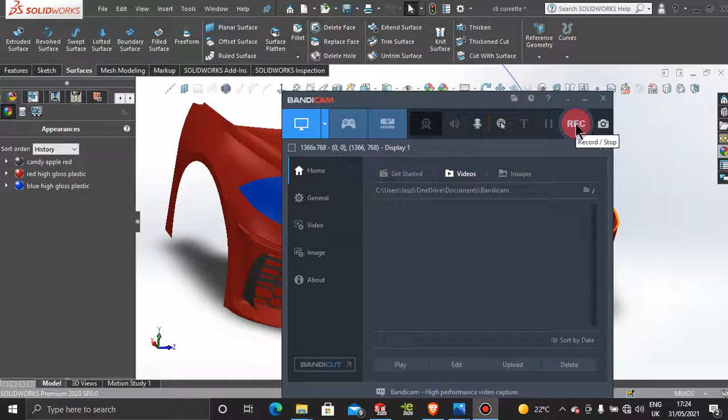In the last tutorial, we filled up the areas we needed to finish. In this tutorial, we're going to cut these joints out from this side here, then create the headlights, and hopefully the bulbs inside the headlights and the LED strip as well.

I'm going to start by removing these appearances, including this red one. Then I'm going to jump into the feature tree and click on this bonnet to bring me up to this area, because I want to get that sketch.

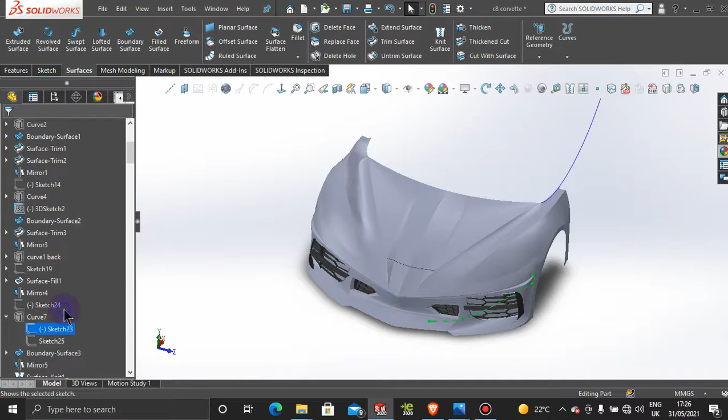It's in Curve 7 and it's called Sketch 23, so I should make that sketch visible.

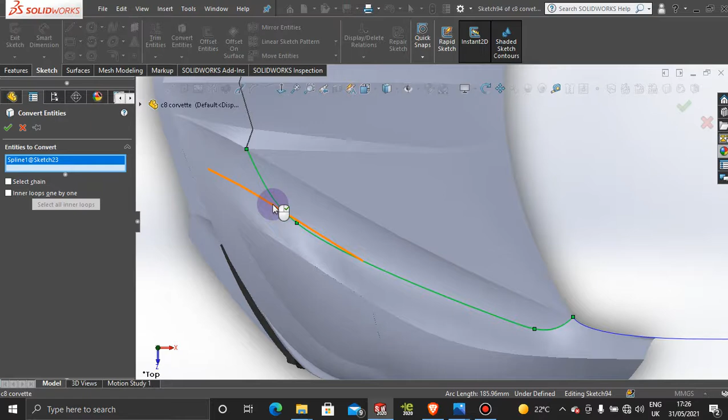What I'm going to do next is make a sketch on the top plane, convert this sketch here, press OK, and then exit the sketch.

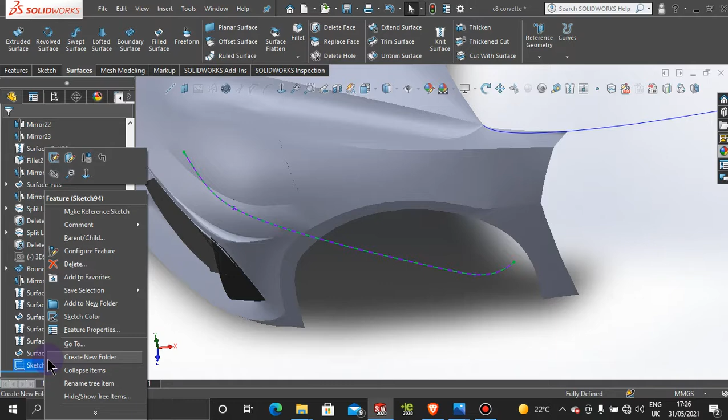I'm going to hide this sketch and hide the second sketch, then come back down here and bring back the first sketch we made, so it's not lying on top of each other. That's the sketch we're going to work with.

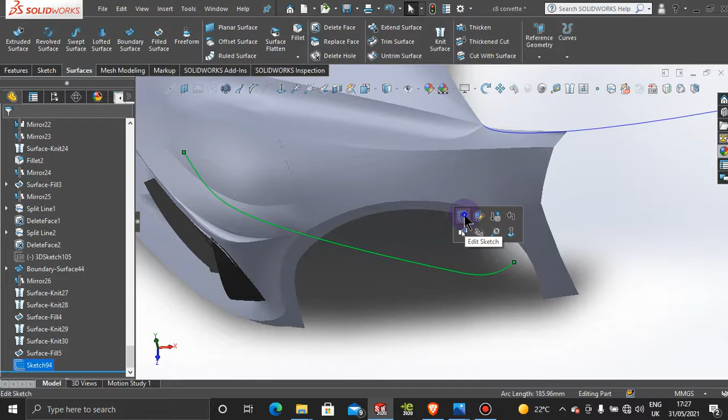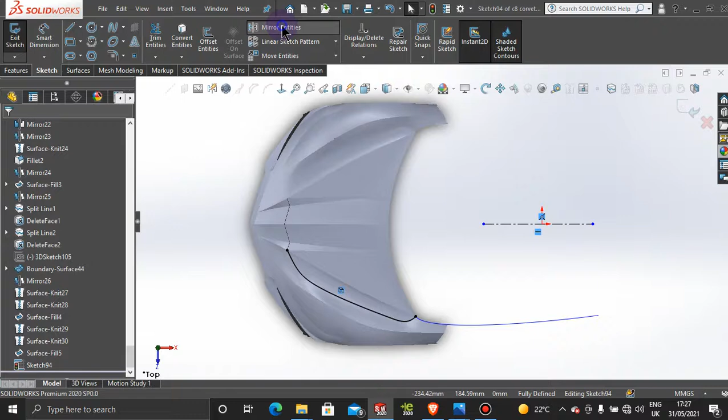So let's edit that sketch, jump to the top, and mirror this curve or spline up here. To do that, let's grab a center line and drop it here, exit that sketch, and then mirror this curve over this construction line. Then we'll come down here and create an offset of this curvature.

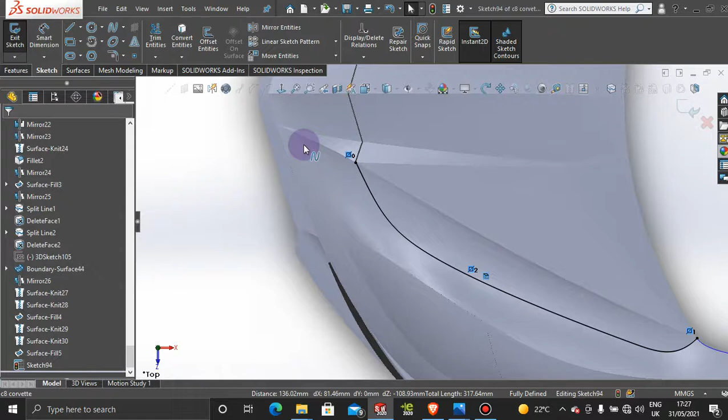That offset is going to come to the outside, not the inside, because we don't want to cut into the bonnet - we need to go outside because that's where the joint is heading. So let's grab an offset, click on this line, and get 0.5 on that. Let's do this side first.

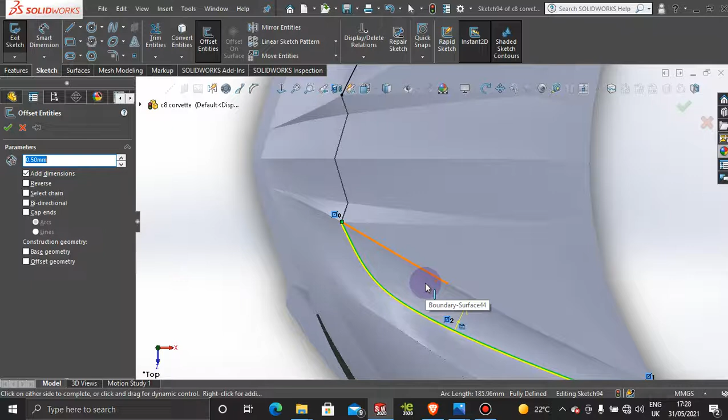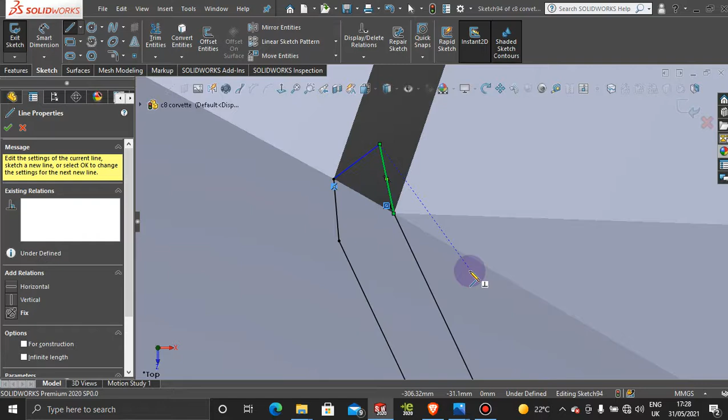Press OK, and I'm going to extend this line, but not by pulling this point - I'm just going to come into this corner and touch to that. So I'll grab this line, come to this corner, go all the way in here, and connect back to that point. On this end, I'm going to create something like a small triangle to connect those points.

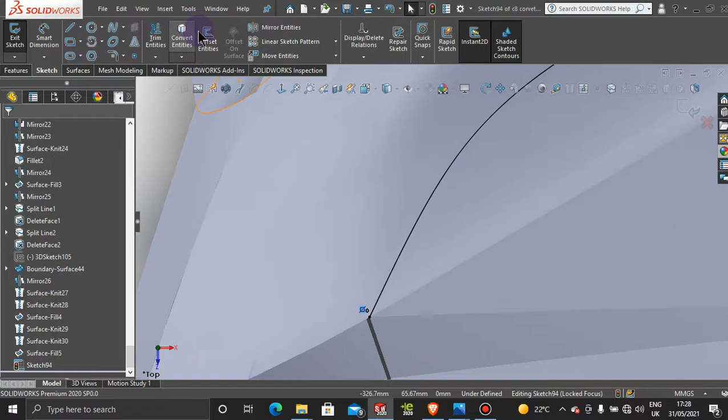I'm going to press OK on that, and OK on that. Now I'll jump over to this side and offset this curvature, but reversely this time. Press OK, and do the same thing on this side as well.

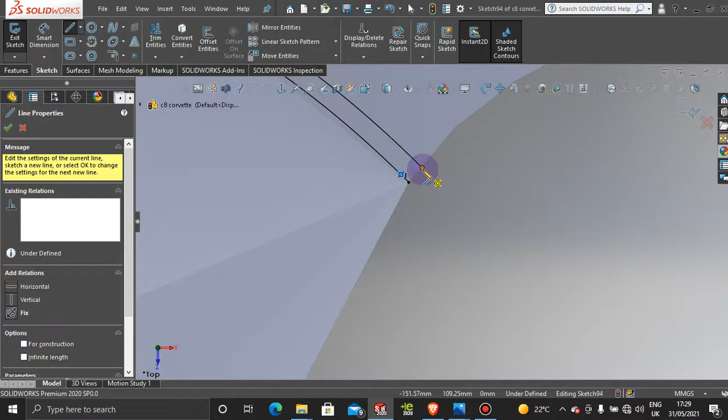Come in here, connect to that, come to the end part. I'm going to press OK on this one and exit this sketch.

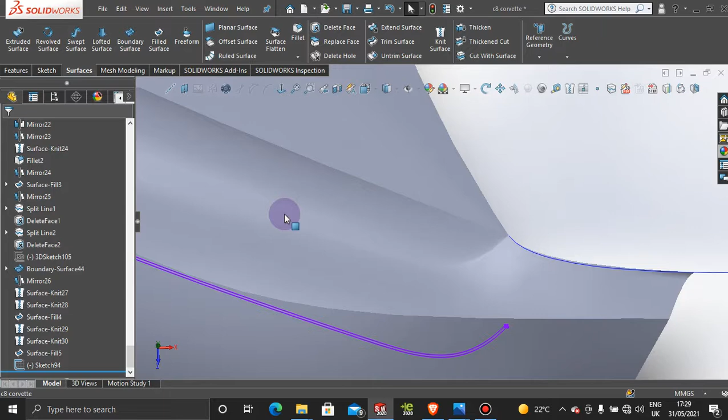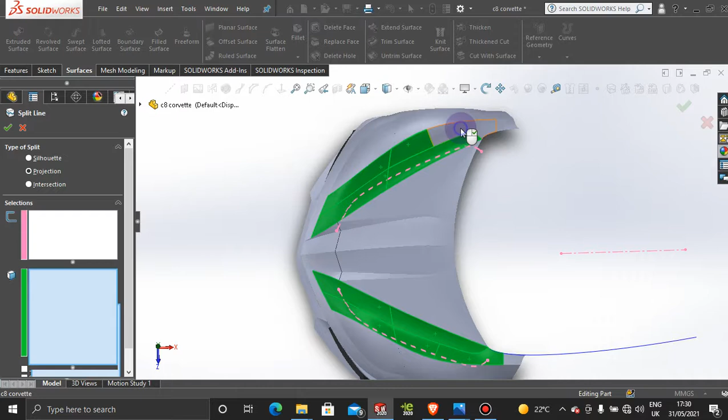Then we're going to do a split command, the split line, and choose the sketch. The faces that we're going to split are these faces here - let's try to do both ends at the same time, though it's possible it won't let us. It's okay, projection - and it did let us do that, so that's good.

So now let's hide these sketches, come in here, and delete these split faces from this corner. So, delete face, and select these joints in here - this is called forced trim.

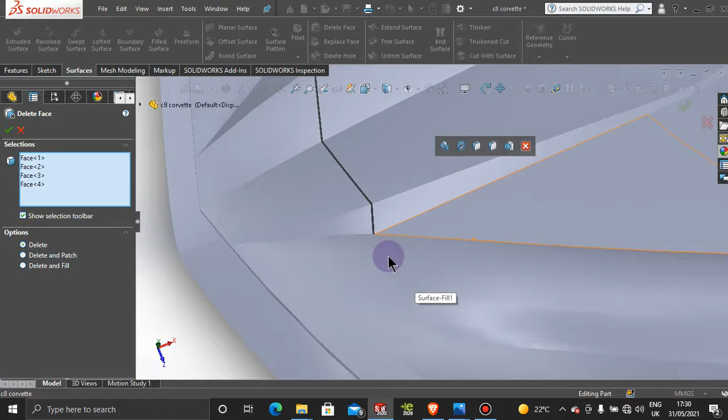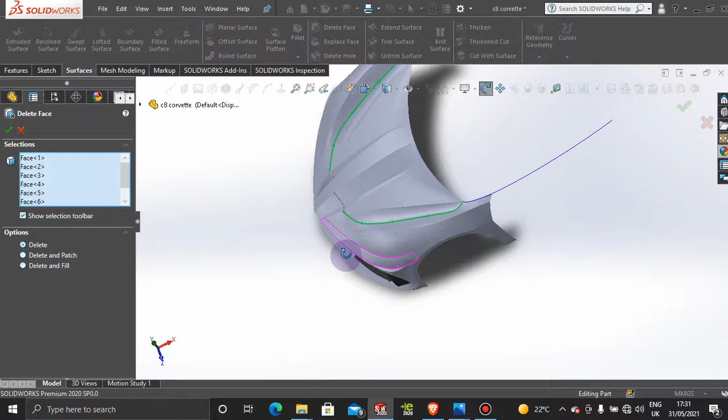There are so many people - if you look on YouTube, Google, or GrabCAD, everyone says it's impossible, that you have to take out the mirror and go back in the feature tree to do that. There's no need to - all you need to do is a split line and then delete the face, and that will solve your problem. But that's not in anybody's handbook, obviously.

Press OK once you've selected all the joints, and now we have all the joints cut out from where it needs to be cut, and our bonnet is free for movement, right? Okay, that's good. Let's save... well, let's not save it.

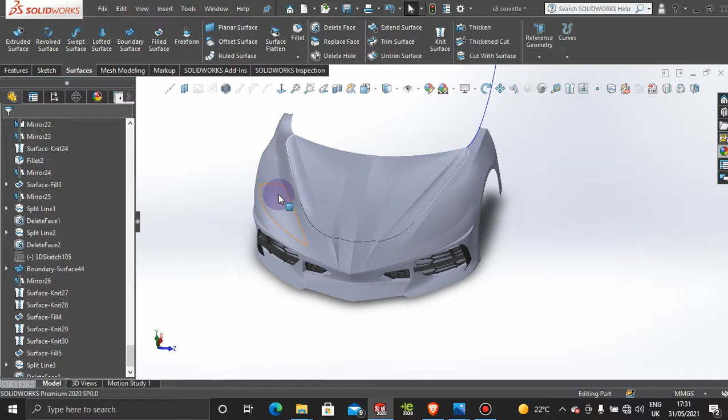The next thing we want to do is cut out the headlights. For that, I'm going to come into the first display state and hide all these hanging about bits here. Once I hide, not delete, hide all these curvatures here, I'll come back to you.

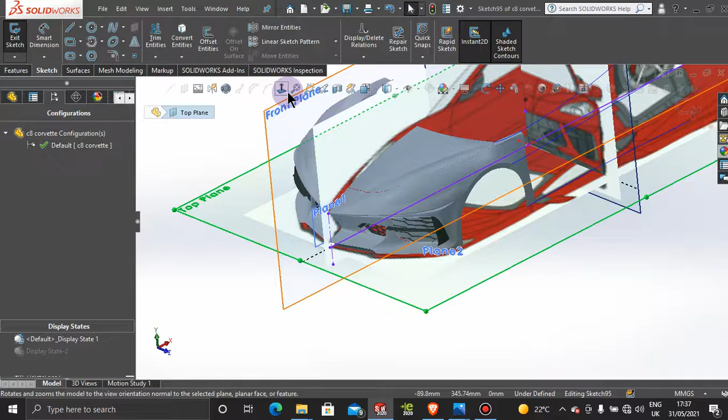Once you get rid of all the hanging out pieces, we can make a sketch. We're going to create a sketch on the top plane, and then we want to flip this model over. So we're going to sketch on this side, then flip it over and sketch there. Let's flip it over.

So we're going to sketch here. Let's also hide that part there. Well, that can stay, we can leave it. Basically you have all these surfaces behind these, so as we're adding our curvature, we don't want to snap to any of these surfaces here.

To do that, just hold Control on your keyboard, and then you won't snap to anything. I grab the spline and just hold Control, and now it's not snapping to anything, right?

I'm going to start from this point here and add a few spline points along the edges here, like that. And I'm going to let go of the control at this point. I'm going to snap to that point there.

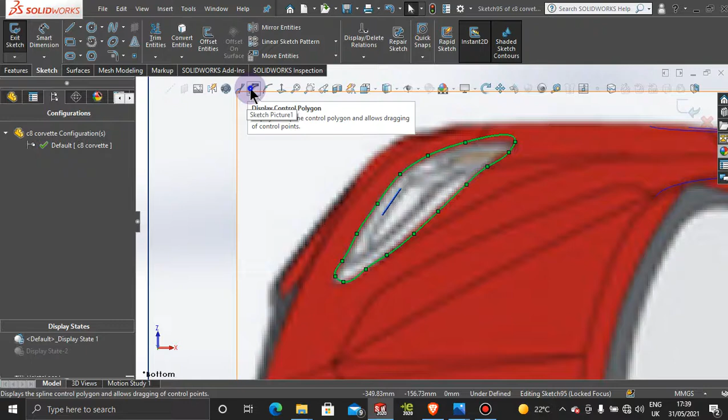Press OK on that one, and then let's bring up our control polygon, and let's grab these handlebars here and adjust these curvatures. Let's pull it up something like that, and we create that lovely profile, that nice profile there, something like that.

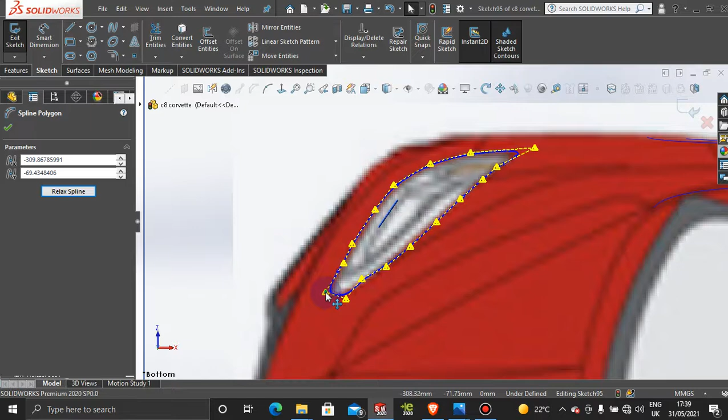So you can play with these until you're happy with it, and that's how it will show when we cut these out, right? So let me bring it up here a little bit.

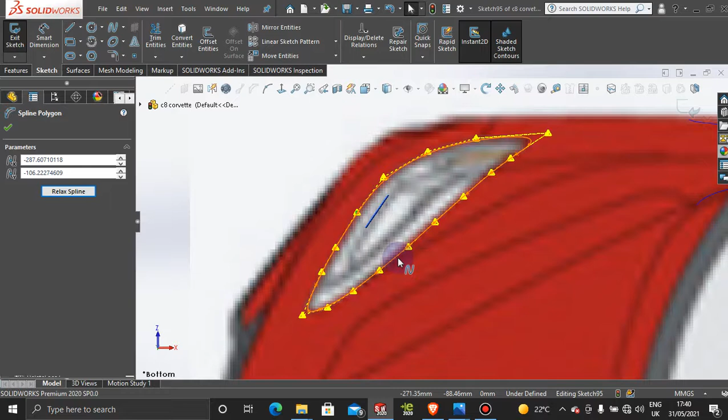We can't always use curvature comb on this complex headlight profile. I'm just going to go by my eye. Obviously we want that beautiful piece of surface here, and we want to be quite straight on these edges here, so let me pull that down a little bit. Okay, I'm quite happy with that, and I'm going to exit the sketch.

What I'm going to do is grab a construction line here, because I want to mirror it over to the other side. Exit that one, grab another one here, and make sure I'm on the center of that. All right, so we are on center, and then I'm going to mirror this entity over.

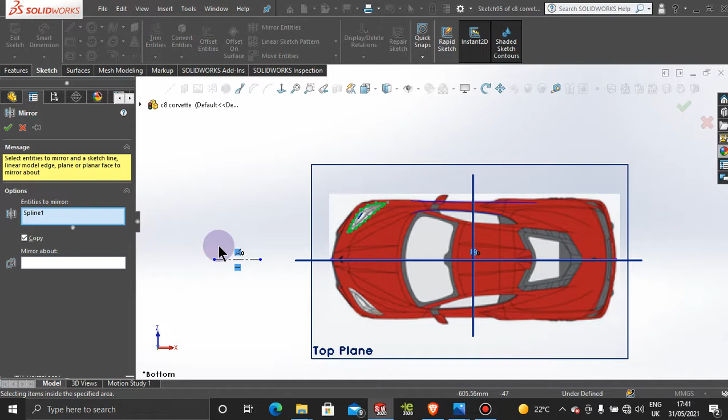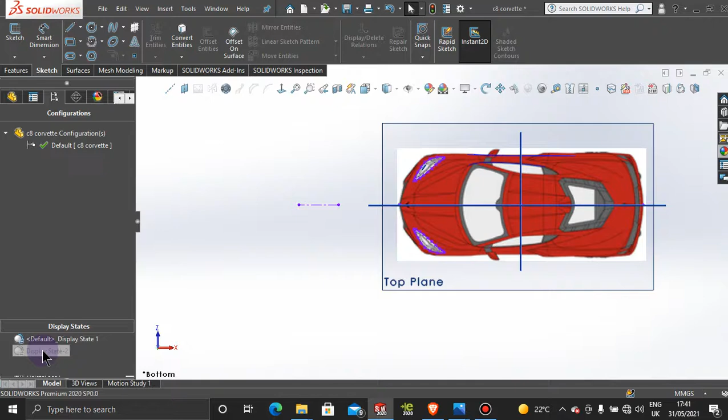I'm going to box select this curvature here, mirror it over this construction line, and that registered there very nicely. I'm going to press OK, and then cut the center construction line, or maybe bring it back. Yeah, let's just leave it, and exit the sketch, and jump back into display state number 2.

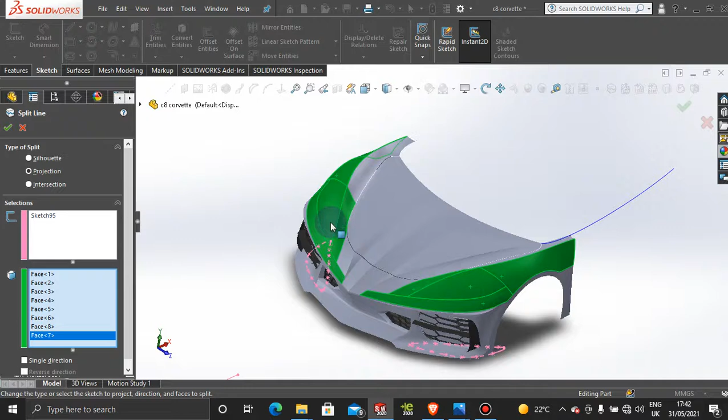Let's split these sketches up to this point, up to these surfaces here. Select the split line command, select these sketches, and then select these faces. Maybe not that, you don't need to go that far, or do we? Yeah, something like that, that's good. Make sure it's projection, press OK, and we're in fact quite good on that.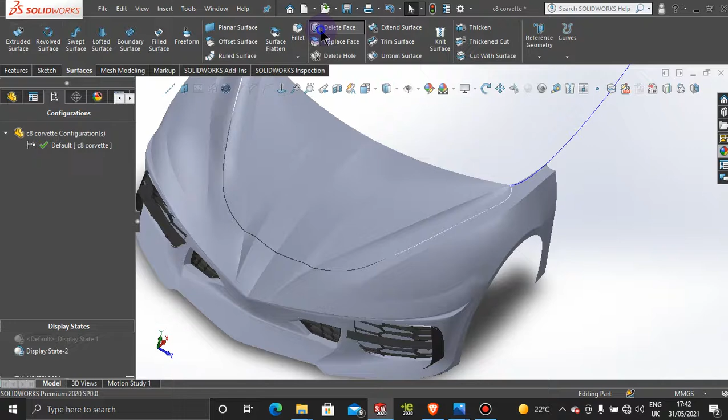Okay, let's go now to surfaces, and let's go delete face, and let's delete these faces. There's a small piece here, don't forget to grab that small piece. Not this, that's not that. So there was a small piece on that side, and this one, and this one, and here's that small piece. Could be wrong, let's see in a minute.

Oh, that looks good. That's a beautiful cut right there. We have this beautiful face here on this end, and this end, and it is just beautiful.

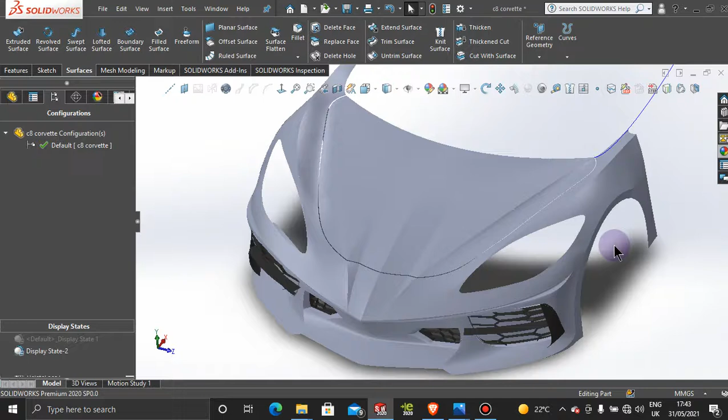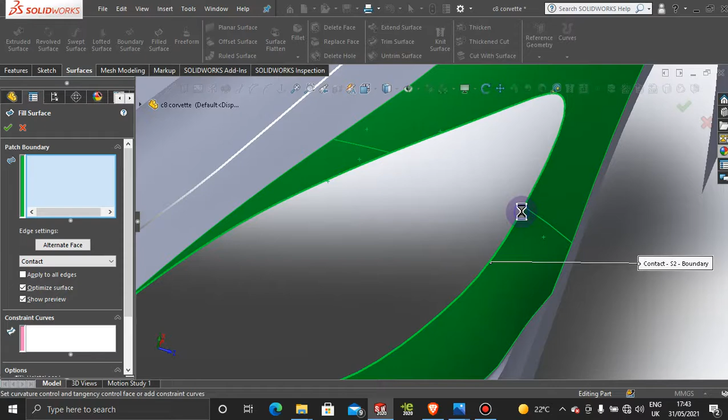So now we are going to continue by adding a surface fill here, which we will cut out, and then I will show you why. So the first thing I'm going to do here is a surface fill, filling up these surfaces. There's a small piece in here. Fill up that surface, and I'm going to press OK.

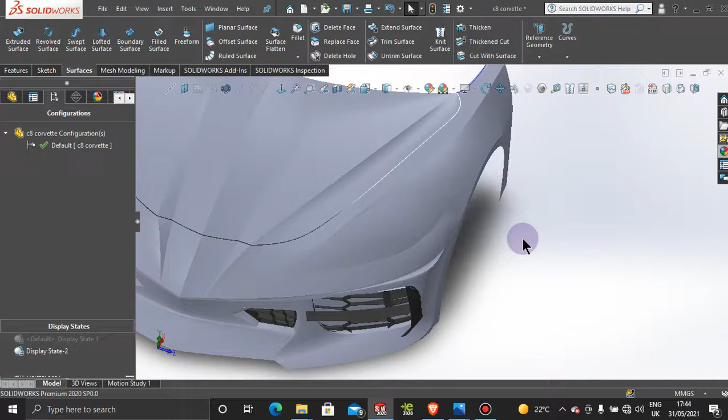And so the reason why I did that is so now I can offset these, convert the entities offset, so I can have myself a 3D profile body all around here. So let's jump into the top view from the feature tree. Top view, sketch on top view. And then I'm going to convert these entities, so I'm going to select the whole inside face, and press OK.

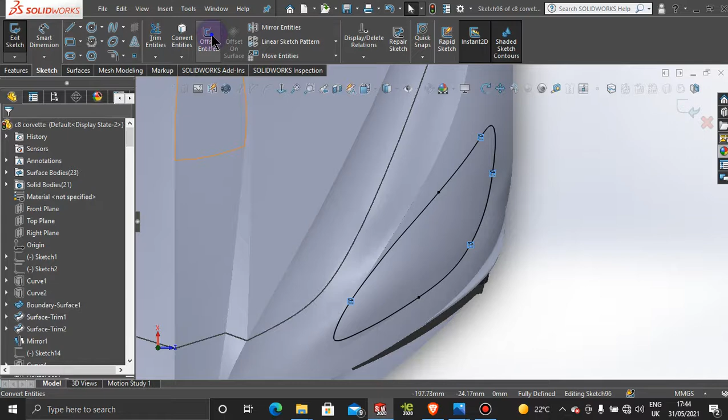I'm going to offset it, and I'm going to reverse that offset because I want to reverse it to the inside. And instead of 0.5, I'm going to use 0.3. I think 0.3 will be a good one for us.

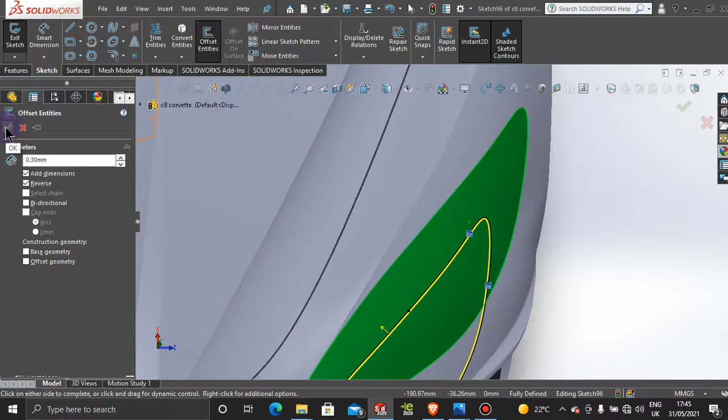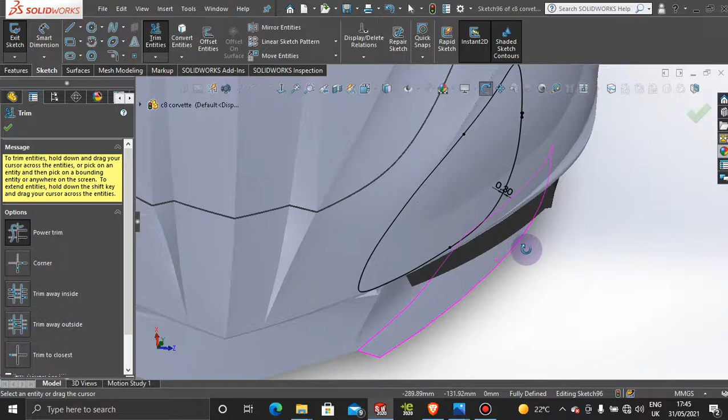So press OK, and then we want to trim out the outside line. Be careful not to trim the inner one, so just trim the outside line here. Okay, that's good. So once you trim that out,

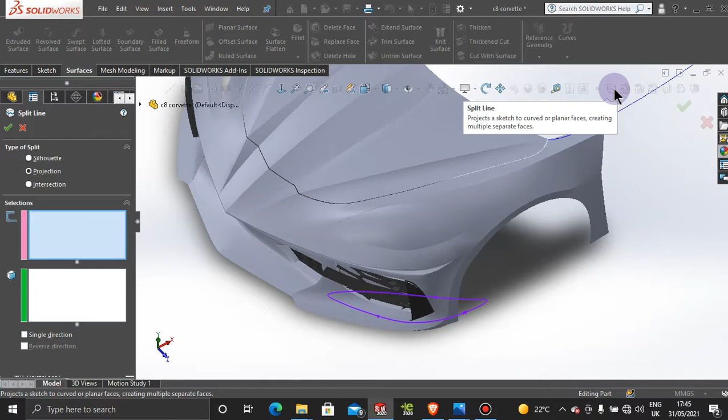we're going to jump into split line here. It's already selected our sketch. Oh no, I have it. Let's delete that and select it again. Hold on a second, let's exit the sketch and do a split line, and then select our sketch, and the face is that face there, projection, and then upward.

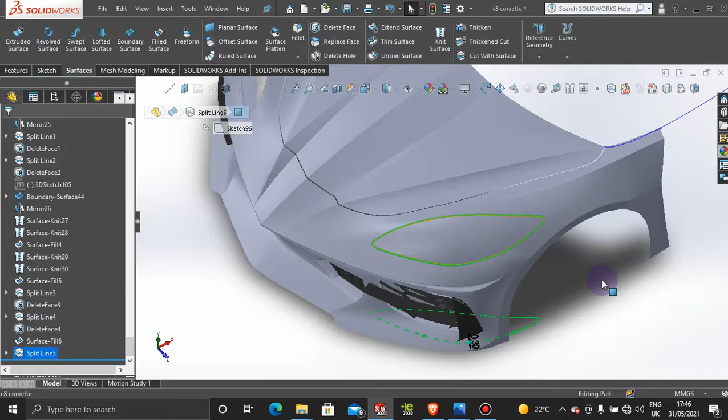Okay, so now I selected that one, and it leaves a little bit of a gap for us, which we determined as 0.3. And then we're going to delete the inner face, so delete that face here. Okay, so we have a nice profile all around here. Let's click on it, you can see that we have that step right there.

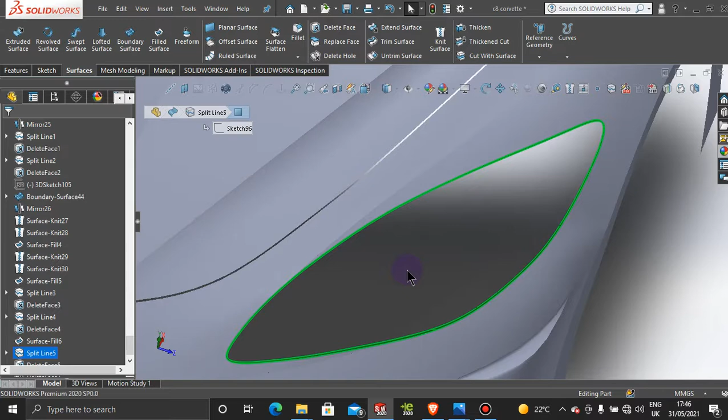Okay, so now let me just bring up these shaded contours so we can see our lines a little bit better.

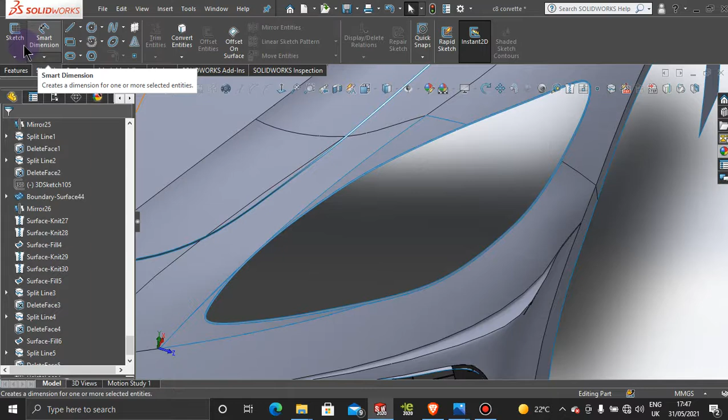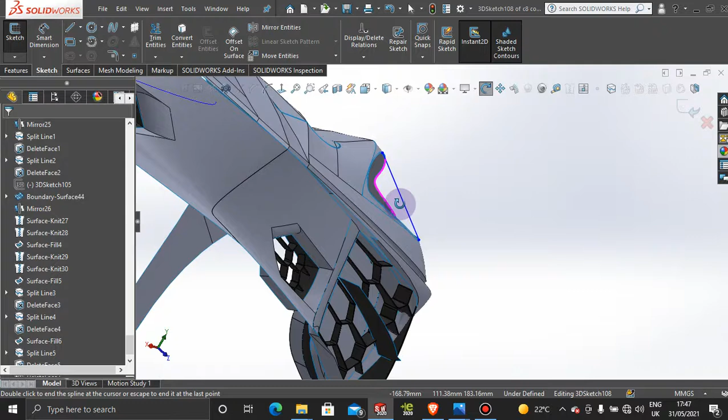What I want to do is grab a 3D sketch, and it's going to be a 3D spline, and I want to add that 3D spline from this edge to this edge here. And you probably already know what I'm going to do. I'm going to give this a nice profile. So the better your profile on this curvature here, the more aggressive the vehicle will be.

I'm going to bring it up all the way up to that point, and this to this point. And then going to exit the sketch, and then now we're going to do a fill surface.

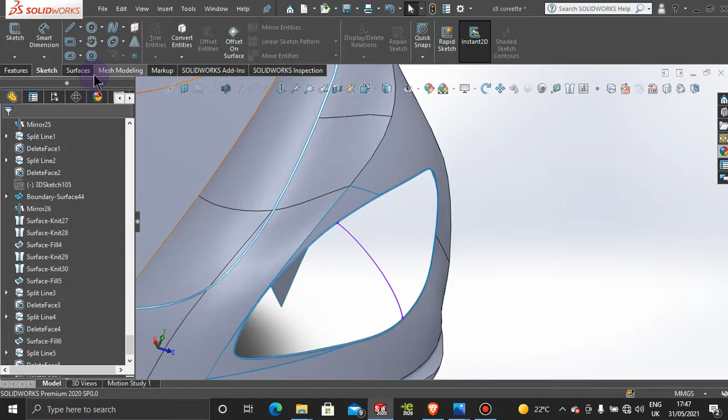So we're going to select this inner edge, and we're just going to check that we have the inner edge selected all the way around. Okay, so you can see here it's not selected. We're just going to select it, and then once you select all the inner edges of that small profile, so not this one, this one here. Once you've selected all the inner edges, we can select our constraint curve, which is this one here, and we're going to press OK.

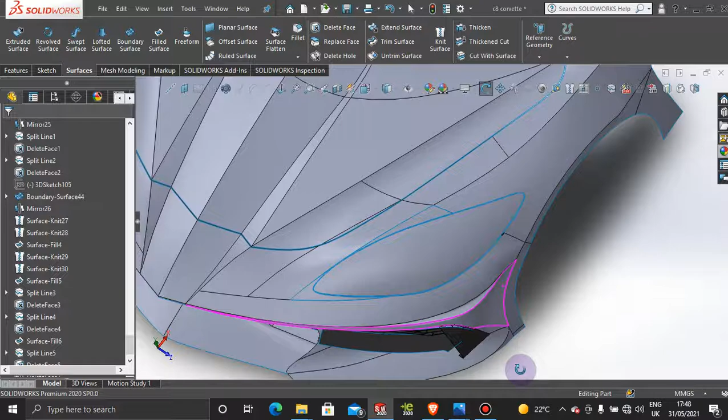And then that looks pretty good actually, and that's our headlight right there. Okay, so if we take off the shades, we can see a lot better. See things a lot better here. Okay, so that looks pretty good.

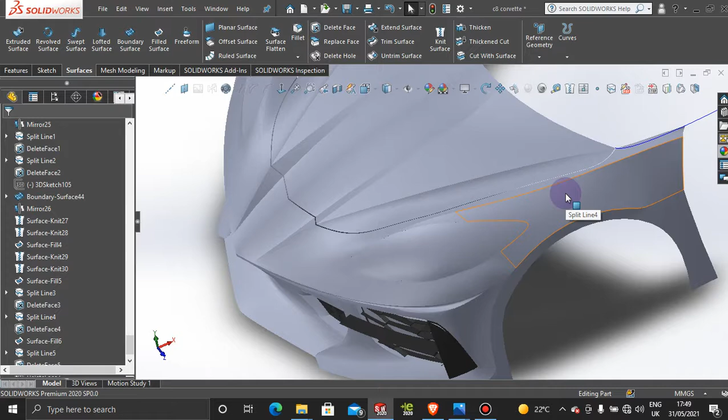Now we just need to create a box for this headlight. So to do that, we're going to hide this body and hide this body here. Okay, and hide this one here as well. And once we bring it back, the whole thing will come back, so don't worry about that.

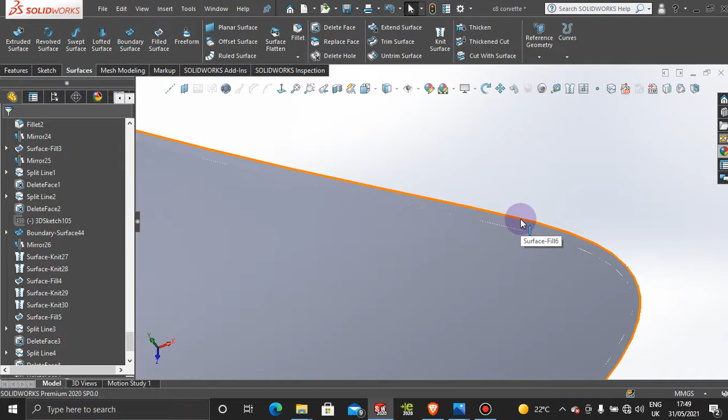And then so we have two surfaces here. The box we're going to create is going to come from this edge, not the outer edge, because that belongs to the outside surface, right?

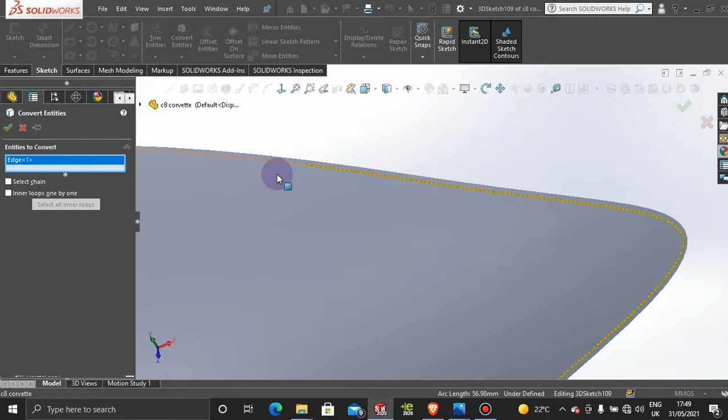So to do that, what we're going to do is come in here to 3D sketch, and we're going to convert these inner edges here. Select all the inner edges there. And so once you selected all the way around, let's press OK. And now we have a converted 3D sketch all the way around this headlight.

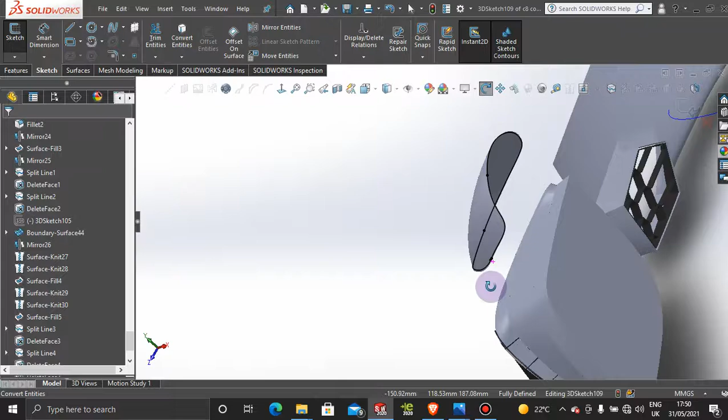So the next thing we need to do is determine the direction of the pull of this surface here. So we need to add a construction line.

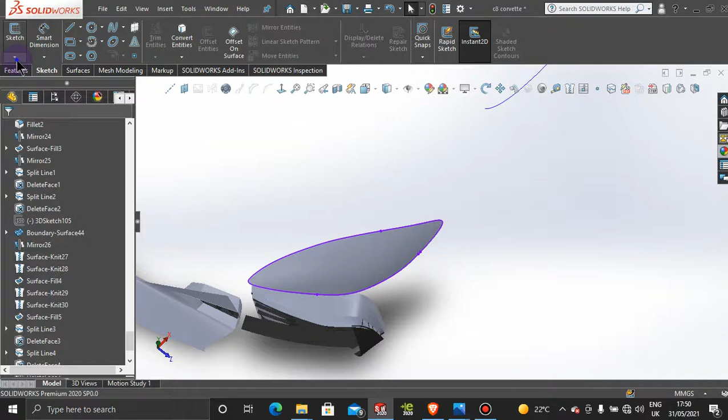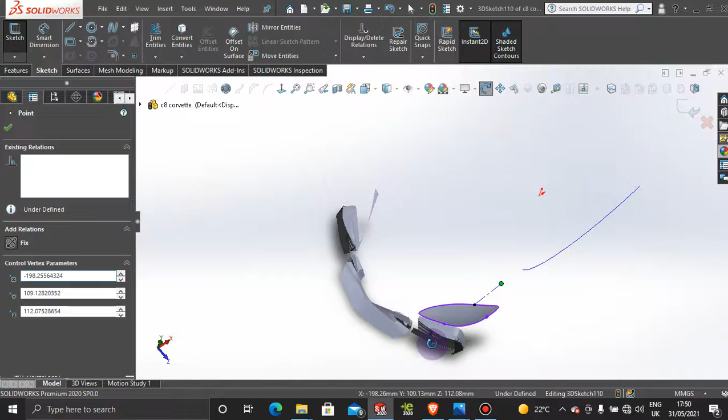So let's exit this sketch and come back into a 3D sketch, and then a center line from this point. And then we're gonna come to the side and pull this upwards because we want the box to pull upwards. Then we'll come to the top, and pull this line up a little bit this way, so the box will pull this way as well.

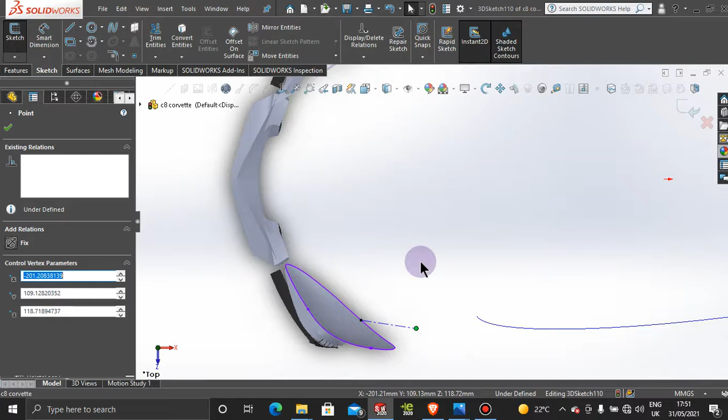But still, I want the angle to be a little bit visible so we look good on these sections. So let's exit the sketch, and then I'm gonna jump into surfaces.

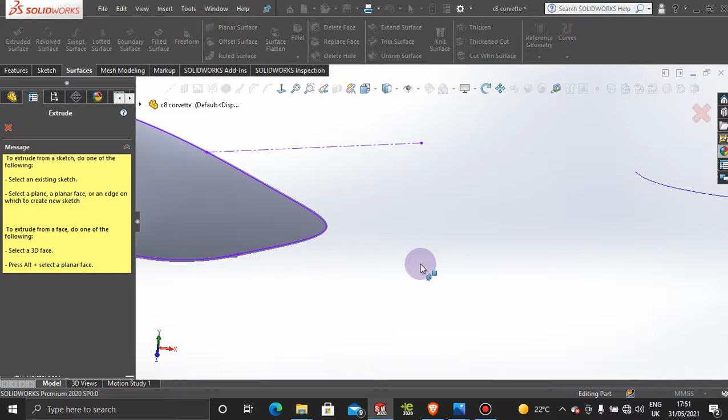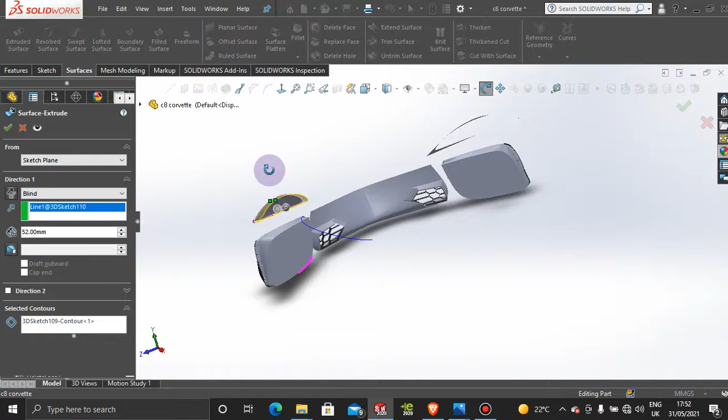I'm going to extrude this sketch. I'll select this sketch here, and for direction it's going to be the center line. Now we just have to pull this out to our desired size for that box. That's a nice box right there where we can put our bulbs and our LED strip. I'm going to press OK for that.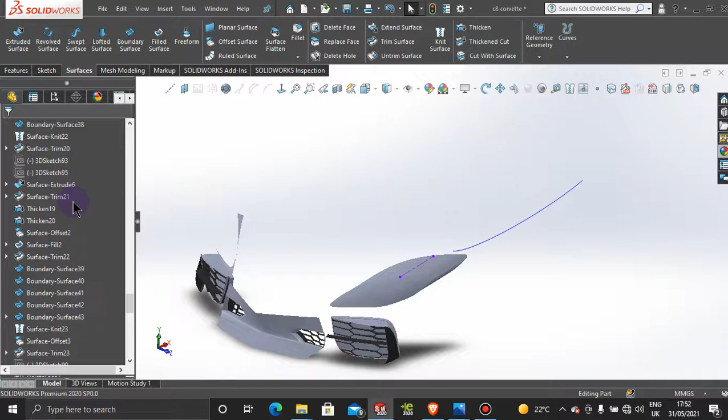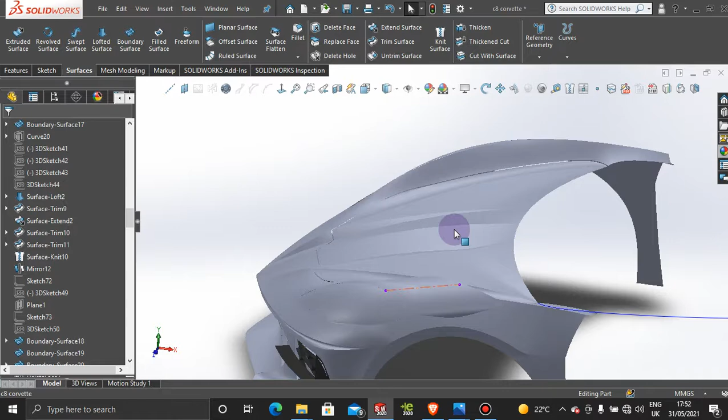That looks good. Now we're just going to bring back our surfaces, the whole car. To do that, just go on this surface, press hide, and go on this surface and press show, and it will bring back the whole thing. Now we can see that our box is coming up this way a little bit too much, so it's sticking out from the actual car.

So to edit that, we're going to come from the side here and just play with that line until we have what we're looking for. Pull that down a little bit, come to the top, and it will automatically update the model as we go along. Unfortunately it snapped to that edge there, so let's fix that up. Let's hold control so it doesn't snap anything, and come in all the way here.

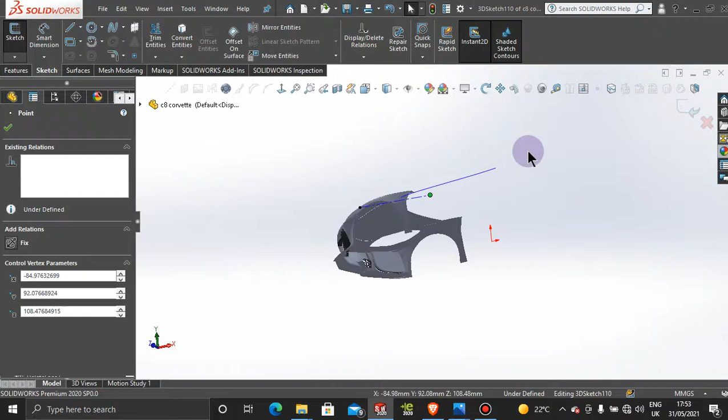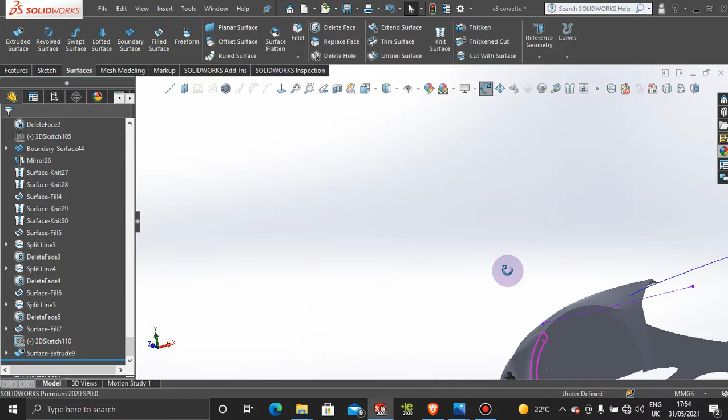Exit that sketch, let's have a look at our box. Yes, we still have our box, that looks good. Let's bring up these shaded surfaces here so we can see a little bit better. So that's our box right there, and you have this surface in the front here.

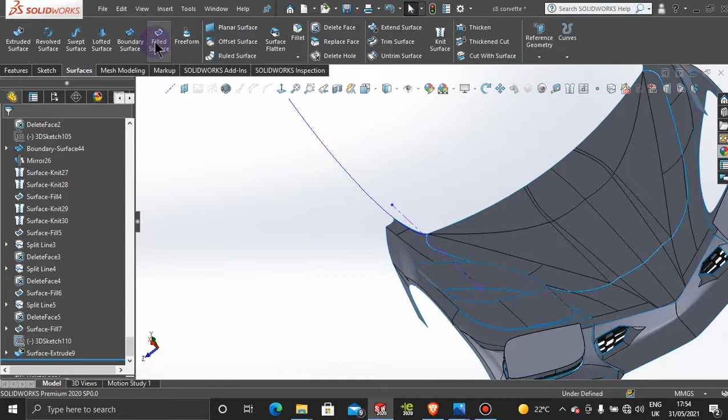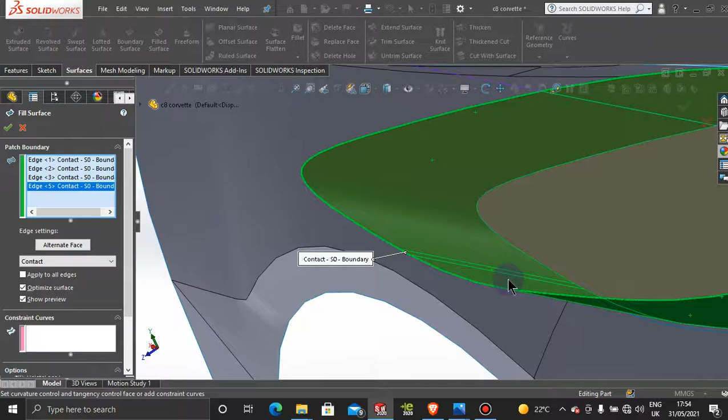First let's cap up the end of this box here. For that, let's use a fill surface. Let's choose the edges of this box and then press OK. It's open somewhere - there you go, the small piece there. That wasn't it, this one here, right? There you go, now it's capped. So press OK, you're not going to make that solid, obviously.

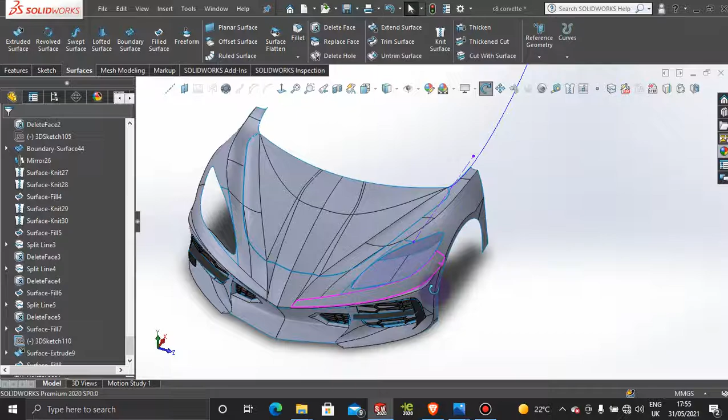And then now we can add a glass onto this headlight. So if we come into glass and add blue glass, now we have our headlight there.

However, I believe that maybe we can adjust this box by pulling it a little bit more forward. So let's click on that and edit the feature, and then let's pull this box a little bit forward so it's not that deep. That's okay.

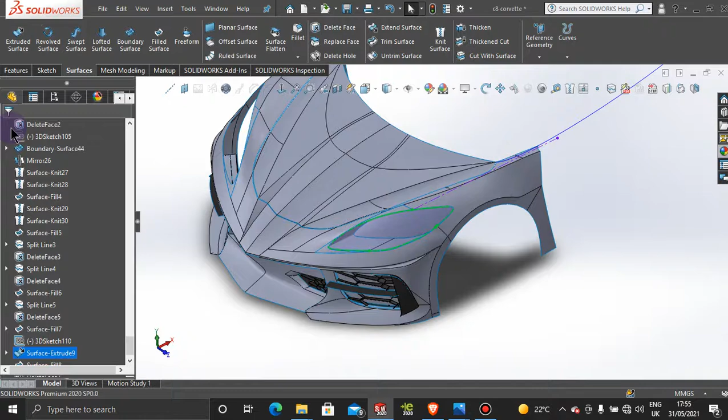And that's probably the deepness of the car itself, so that's probably the right deepness for that sketch. That looks good to me. And then we just need to add the light bulbs in here and the LED strips. So let's have a look.

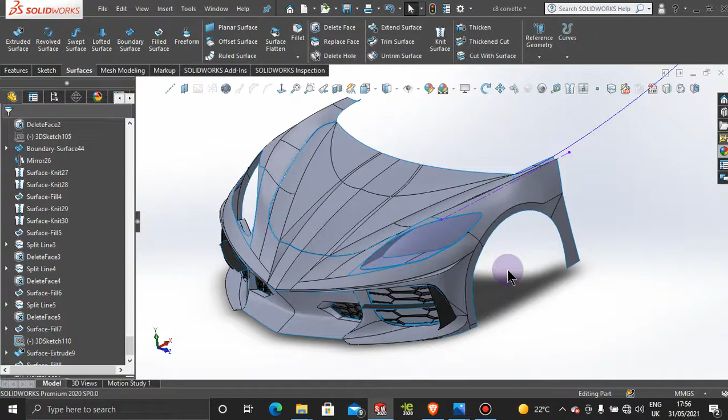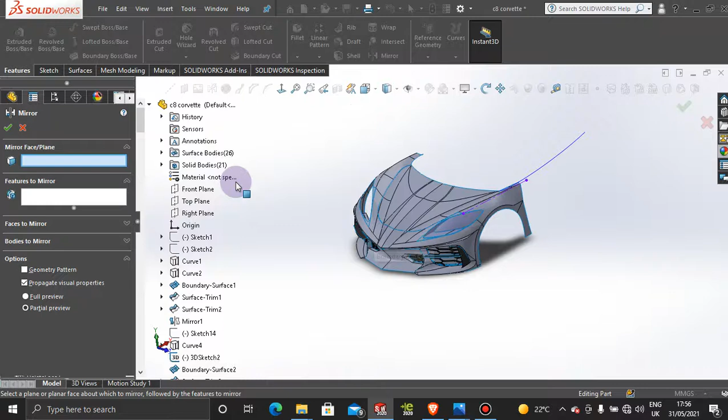All right, so let's mirror these bodies over to the other side. So mirror here, and then we haven't cut anything out from the outside surface, so that's good. For mirror face plane, we're going to use the front plane, and for the bodies to mirror,

we're going to use surface fill, the box, and the cap. And let's have a look if we did the mirror correctly. That looks good.

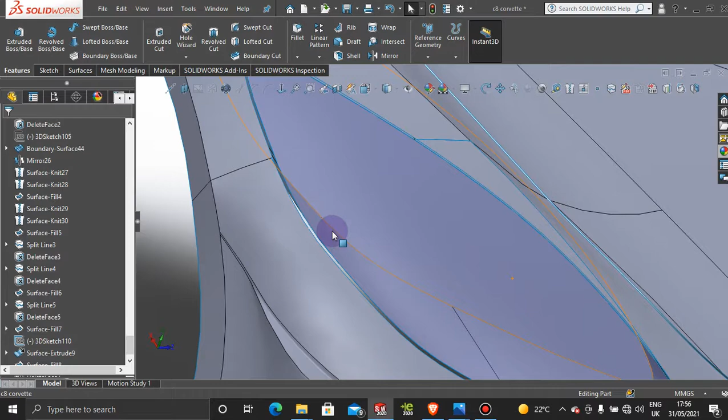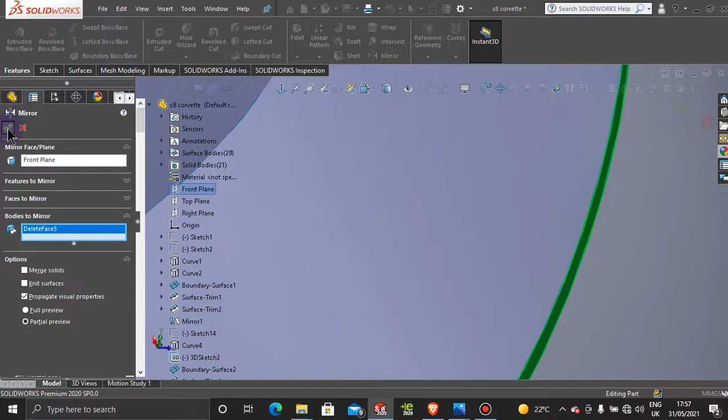However, we missed out that small piece there, so let's grab that. Mirror command, then front plane, and then bodies to mirror - just zoom in here and grab that small surface there. Okay, so now we have the small surface in here as well, which is this one here. That looks good.

All right, so I'm going to leave this tutorial here at this point, and then we're going to come back and add the light bulb and the LED strips in part 20. So hope you enjoyed it so far.